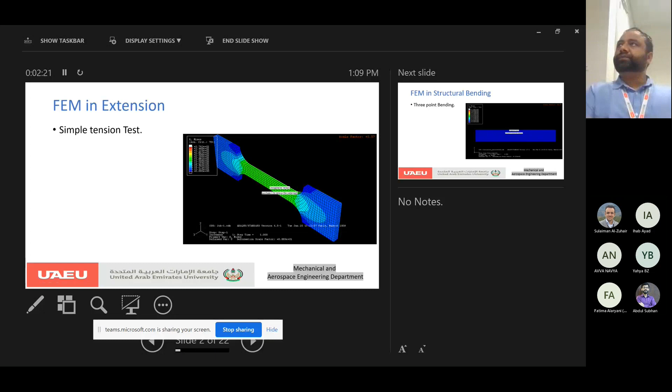Another application is bending, related to civil engineering. A 3-point bend test is done in most classes of problems where material properties are to be obtained. This part is fixed, this part is fixed, and the load is applied from the top. This obtains the bending and flexural stiffness of the material. Usually this is an experimental procedure. Through the finite element method, people have tried to simulate it and obtain matching material properties corresponding to the experimental counterpart.

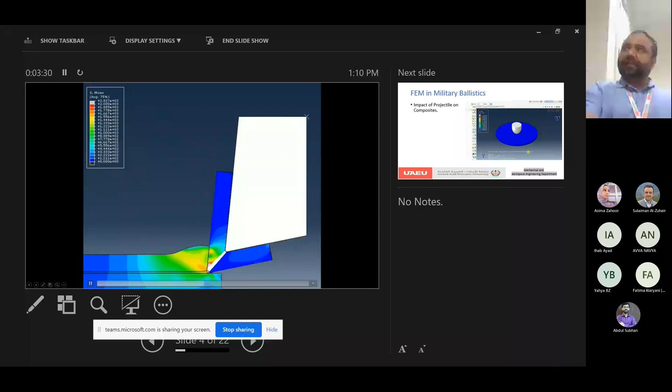This is one problem related to manufacturing, where chip formation is observed during machining. The important thing to note is that though there is chip formation, the tool is also deformable. The chip as a material is deformable for sure. Here the tool is also deformable. That's why you can see various stresses acting on it.

The machining process is a very complex process, and obtaining such a finite element model is very complex in nature, because the elements are getting deleted at each and every section. It's a highly non-linear complex problem. No, not multiphysics. Yes, thermal concepts are also included in the finite element method, and we will discuss that.

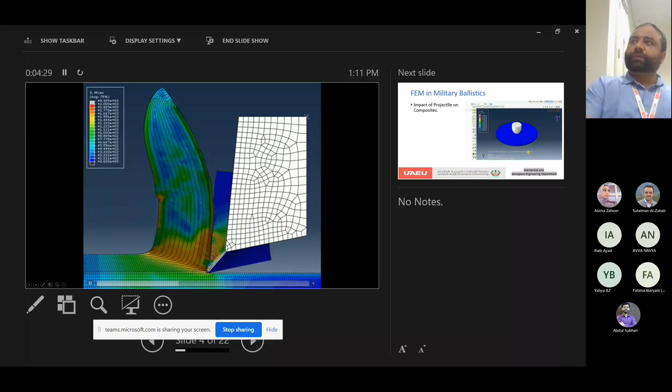Do you make the grid for all the domain, or the grid only about the part that moves? There is a grid. This material is getting fed. This is the feed part. The tool is fixed, and the material is being fed through the tool. No, I'm talking about the mesh. The mesh for the whole domain or just the extended region? Is the mesh only on the colored region, or do the other regions also have a mesh that you cannot see?

My question is that now this is moving up. There is mesh here. This means the mesh is moving? No, this is a movement of the material. This is a dynamic problem, movement of the material. The tool is fixed. At the beginning, did you make all this block as a mesh, and then the movement is inside the mesh? No. Okay, this mesh is moved. Yes, this is moving in this direction.

This is a dynamic situation, just like what happens while machining a material. And the mesh can move in any place, any area. It will move according to the physics of the problem. The mesh moves based on the physics of the problem. At the beginning, on the first slide, this is only the mesh. And then by running, the mesh is moving. Yes.

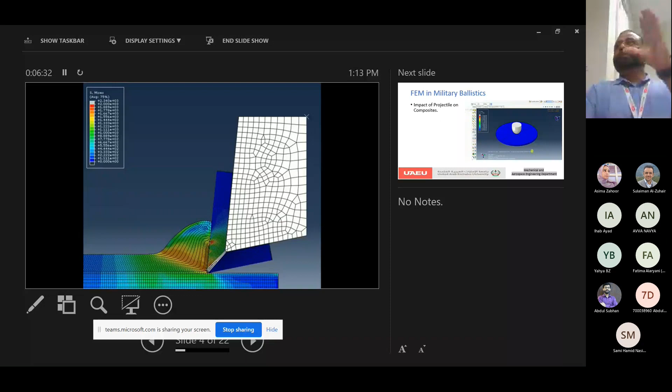And does the number also increase? No, not the mesh number. This means that the mesh size is expanded? No. The mesh is fixed. We will discuss the mesh also. Once the mesh is fixed, it is fixed. After that, this is the physics of the problem through which the cutting happens; this is the chip of the material. So the chip is coming out as the physics is moving, through the physics of the problem.

What about the mesh? The shape can move. In fluid mechanics, we do the mesh for all the domain. For example, if I throw a cup of water, in this case we should mesh all the room. Then inside the mesh, the water can move. We solve for all the domain. But this is my question: is this all the domain? You solve all the domain? No.

Is the body moving here, or is this just the mesh, and you solve only in this area? Only in this area. And in this case, if this area increases, does the number of mesh elements increase? No. Does the size of the mesh decrease? No. It is constant. But how, doctor? Should the number increase or the size change? We can see the expansion. How can the mesh not expand?

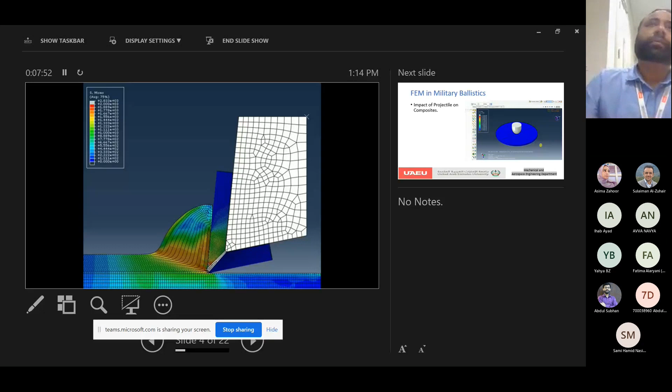The mesh is fixed. For solid problems, the mesh is fixed. How is it moving up? This is due to the physics of the problem; the mesh is moving. Can we move on? Yeah.

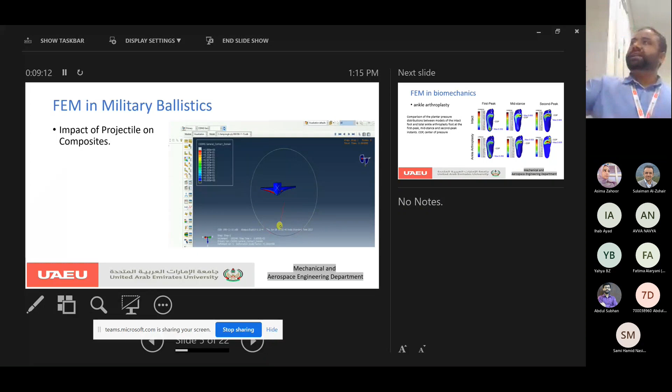We can also see the delamination part. Through FEM, we can actually cut the section and see the details of the inside layers, how the layers undergo delamination during failure. In experiments, this is very difficult to observe, the inside delamination of various layers. So this is one of the major advantages FEM gives you.

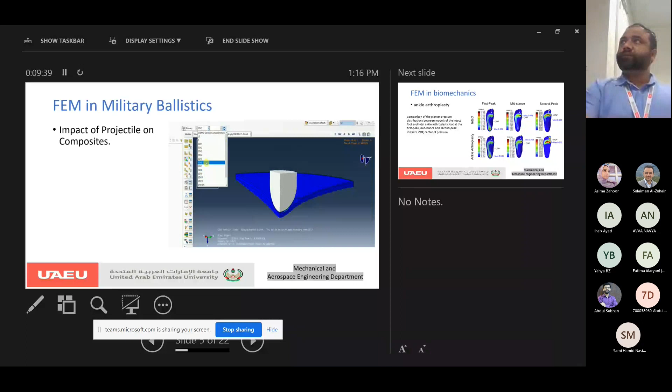In biomechanics, there's this field. FEM is also being expanded in biomechanics and related medicine areas.

This is one of the papers on ankle arthroplasty, which is a replacement of the joint. You can see that the contact pressure is generated at these areas, and these are the first peak. This is an intact ankle, and this is ankle arthroplasty, meaning a prosthesis ankle. This is a mid stance. As the pressure is increased, this is simulated, and externally the contact pressure is increasing. This is for the further increase in the pressure.

So FEM is actually utilized in various fields of engineering. Now we'll see how it solves a wide variety of problems in engineering.

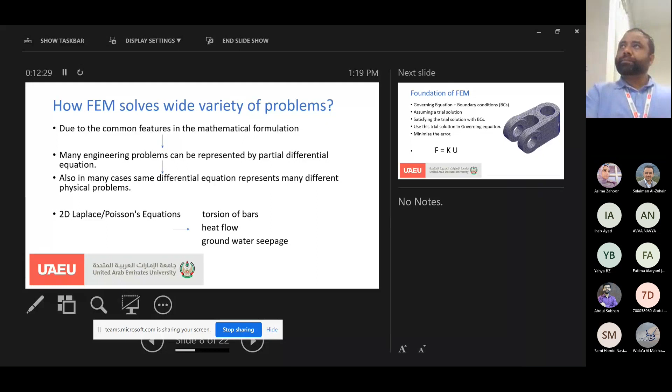How the solution happens is another important area. First of all, in any problem, we have a governing differential equation, which is always accompanied by boundary conditions. So we have a governing differential equation and boundary conditions. What we used to do is assume a trial solution, a simple linear trial solution. Like we need to find out the displacement at this point, ux, xy maybe - let's keep it one dimensional. So ux is a simple polynomial function like a0 plus a1 x plus a2 x square plus a3 x cube and so on. This is a simple polynomial which can increase its order, and as it increases its order, it can capture various deformations that occur on a model.

Once this equation is there, it needs to be satisfied with a boundary condition - in FEM this is known as the natural boundary condition. So this simple trial solution satisfies the boundary condition, and then the equation obtained is used to solve the governing differential equation. The overall idea is to minimize the error. Once the error is minimized, we finally end up with force equals stiffness times displacement. Because any element in these finite element meshes depends upon two field variables: force and displacement. The stiffness is the material property, which is K. So each and every element has its force component and displacement component, and they are related with a K matrix, which is a stiffness matrix.

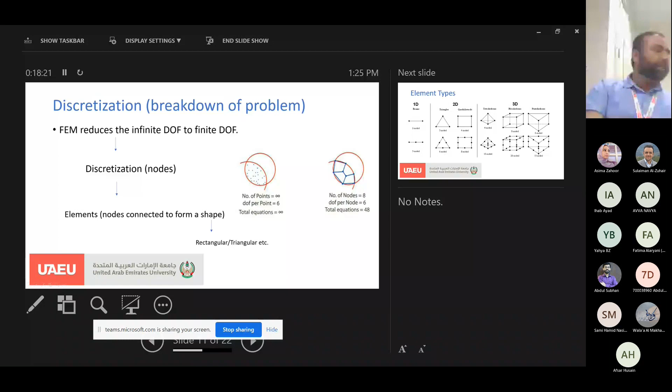Then to represent and solve 2D problems, 2D elements like a triangular, 4-noded quadrilateral, or maybe a 6-noded triangular element can be used. As we increase the nodes, we increase the degrees of freedom, and further we increase the overall equations. Degrees of freedom remains constant per node, but as the nodes increase, the overall equations increase. So you can increase the nodes to obtain a more accurate solution, but the overall computational resources will be much higher. Something similar goes for 3D, because in 3D all 6 faces have to be there, so the nodes increase in size, and this increase makes the problem more complex. This is the reason why computers are being introduced to solve these complex problems using the finite element method.

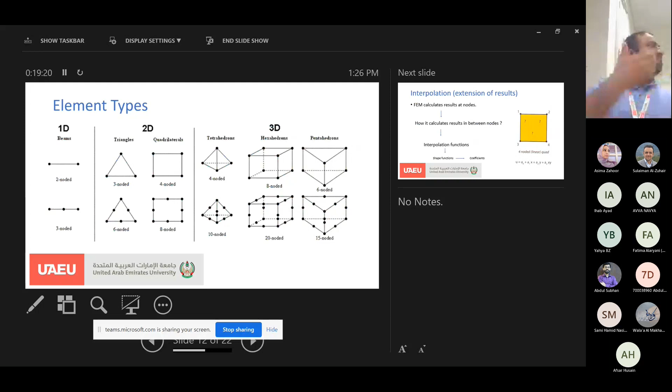Now we know that these nodes are the building blocks of any problem, and all the calculation happens at these nodes. Calculation means the displacement is obtained at these nodes, and using the displacement we can obtain the stresses, strains, etc.

At these particular nodes, the field variables are there: stresses, strains, displacement, etc. But what about inside the element? Inside the element, the information is not available because nodes are not present. If you put a node anywhere, it will give you information of displacement, stresses, and strain, but inside the element, nodes are not there. So the FEM interpolates the results, extending them using simple shape functions. So FEM calculates the results at nodes only, but these results are extended at unknown or any required points inside the element. These are known as shape functions.

The shape functions are represented as: U1, a displacement at this node, U2, maybe the displacement at this node, and similarly for these two also. So the overall displacement inside the element will be N1·U1 plus N2·U2 plus N3·U3 plus N4·U4, where N1, N2, N3, N4 are the shape functions which represent the interpolation of the results over the element.

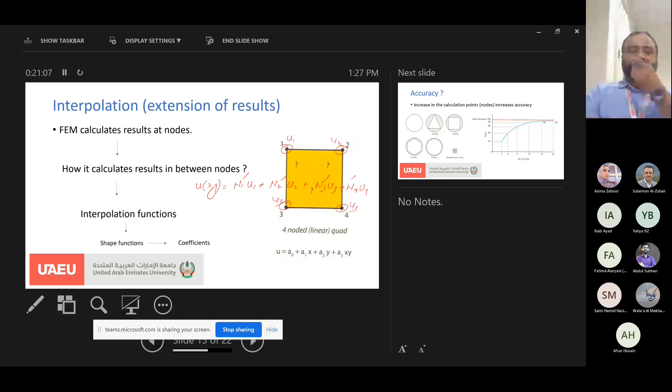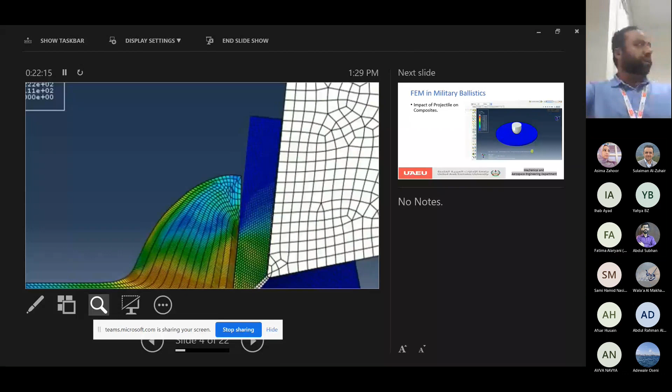Now to understand this more, we will go back to one of the problems that we have seen. Let me zoom this. Now these are the elements - everybody knows these small rectangles are the elements. We know these have 4 nodes, 1, 2, 3, 4, or here you can see 1, 2, 3, 4 nodes. But regarding the deformation, they have information inside the element also. This deformation information inside the element is produced by shape functions, which are linear simple interpolation functions used to give the deformation over the whole element. Otherwise, we would have gotten the deformation only at the nodes. So the shape functions connect themselves from one element to another, and they give a progressive deformation profile over the surface.

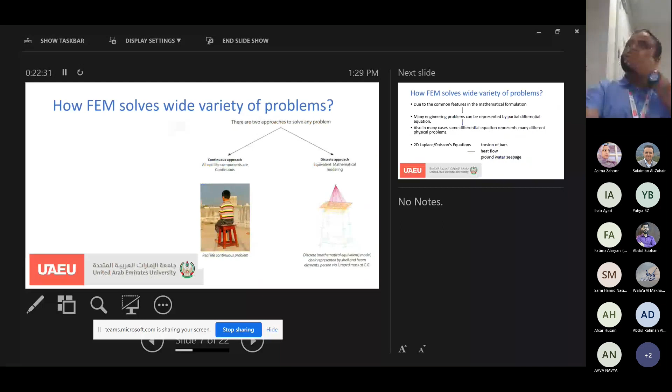Now, what about the accuracy? The accuracy of FEM depends upon one's choice, how accurate a solution he wants in the results. For example, this is a simple circle. If we shade it with a triangle, this much part is left out. If you make it with 4 lines, the rest of the part is much smaller. If you make it with 6 lines, the remaining part becomes even smaller. So as we increase the nodes, our solution accuracy increases further. In this graph, it's clearly shown that as the number of nodes or lines increase, the exact answer, let's say 100, is approached with a curvature converging onto it.

For the most accurate result, you can see that it is having a displacement about the same as what it should be. So an increase in the number of elements or nodes will lead to higher accuracy.

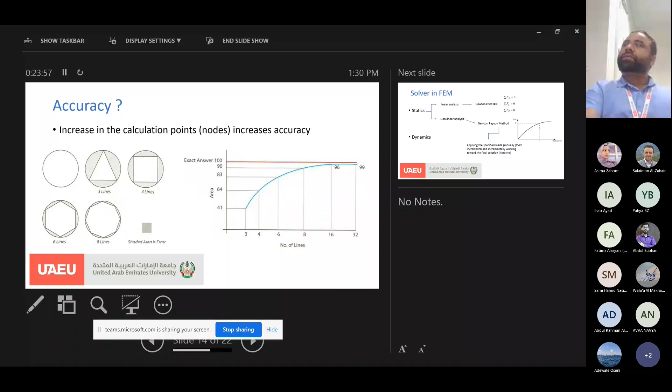A small advanced part of the FEM that we're going to see today is the solver used to solve the problems. Any problem can be defined in two general aspects: either it may be a static problem or a dynamic problem.

In the static problems, we may be having a linear analysis or a non-linear analysis. In the linear analysis, Newton's first law governs every problem, which represents summation of all forces equal to 0. That means there is no acceleration in the problem.

For the case of non-linear analysis, the solver uses the Newton-Raphson method, which is applying the loads gradually. The same formulation is used, but in non-linear analysis you cannot apply a lumped mass overall throughout the problem. So you do that incrementally via the Newton-Raphson method, where loads are applied incrementally.

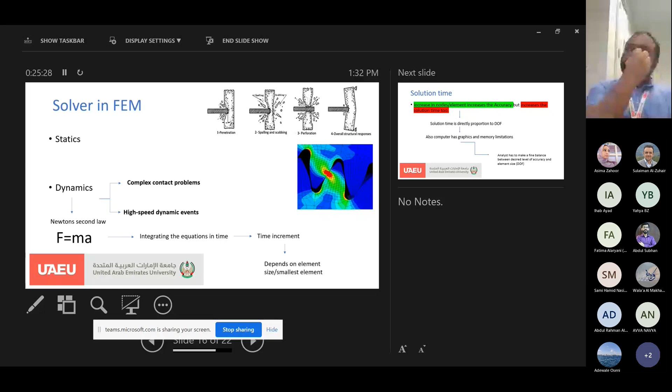In a dynamic situation, complex contact problems can be dealt with, or a high-speed dynamics event can also be solved. So a dynamics problem requires a formulation F equals ma, where F represents all the externally applied forces minus the internally applied forces, m is the mass of the overall model, and a is the acceleration. If the model is accelerating, this formulation can be used.

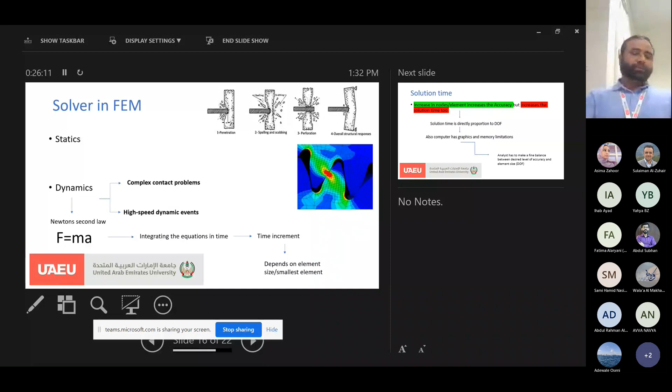This is a basic governing differential equation in dynamics, but this equation further needs to be integrated to obtain the time increment. A very simple version is written here, but usually it involves x double dot and the applied forces. So this is the governing differential equation that actually needs to be solved in the case of a dynamic situation.

For the dynamic situation, there are many examples, like a projectile impacting a plate or a ballistic material. So this is, for example, a ballistic material. A projectile is impacting this plate and moving out from this side. So this is a dynamic behavior.

This movement of the projectile impacting and coming out from this side can be represented on a timeline. These are the small events on this timeline: movement of the projectile, getting impacted, perforated, and getting out from the other side. All these events are there on this timeline. So FEM solves this using a time increment. All dynamics problems are solved using a time increment formulation.

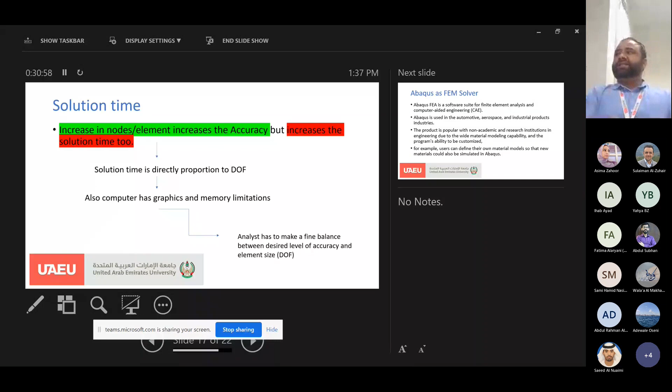Now, FEM as a solver: we have many FEM solvers available. We have ANSYS, we have Abaqus CAE, we have Nastran, and there are various other software packages available to solve FEM problems. Whatever basics we have gone through for statics and dynamics, we'll see in the hands-on session also.

These solvers are used in automotive, aerospace, and other industries. And these products are very popular among academicians and non-academicians both, because they are able to solve their problems with them. Even industrial people do not require a deep knowledge of the finite element method; they can use it just as a modeling software, use the basics, and solve their problems.

However, the software package Abaqus has the advantage that a user can define their own tailor-made materials. That means through the differential equations, we can actually put in our own material. For example, in composites, a well-defined failure material is not available. So we can use our own well-defined materials. For that, we have to write a small code. So that part can also be done in these FEM solvers.

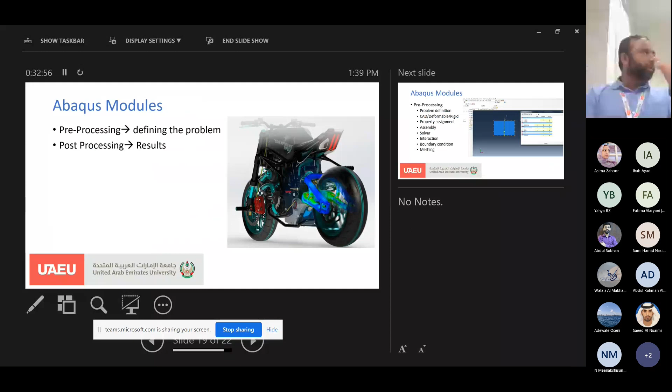It has two major parts. First is pre-processing, in which we define what exactly the problem is. And how do we define the problem? First of all, we define whether we have a deformable material or a rigid material. We will assign a property to that material: how much stiffness it has, how it fails, which law it will follow to fail.

We will assemble it if it is required. We will assign a solver to it. If it is a dynamic problem, we will assign a dynamic solver; as I told you, it requires a time increment and integration in the time domain. If it is a static solver, it will require a basic Newton-Raphson method to solve it.

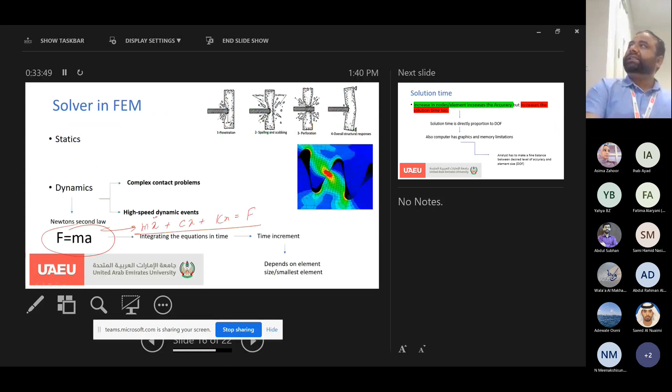Then for all problems, we need to put the boundary conditions. This is an essential step. Deformation, property assignment, assembly, and boundary conditions are the essential steps required in every model. And then finally, we mesh the model. There are many meshing techniques available which make the mesh proper in your case. And then the post-processing of the results is done using simple output files. We'll see how that is done.

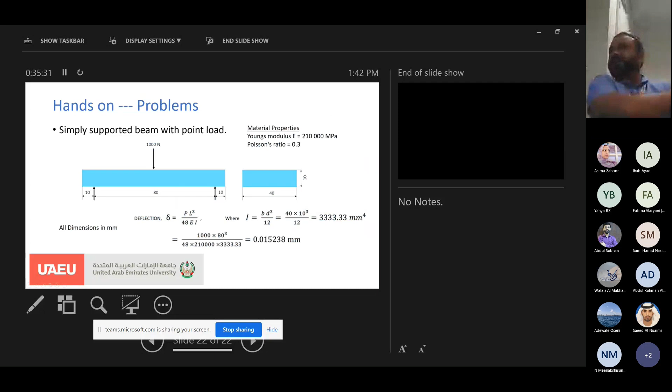If you put in the relevant values, you'll get the displacement as 0.0152 mm, something like that. Now we'd like to see if FEM can produce this result. We'll see quickly, because we have a shortage of time, in a simple hands-on. I'm using the software package Abaqus for this simple problem.

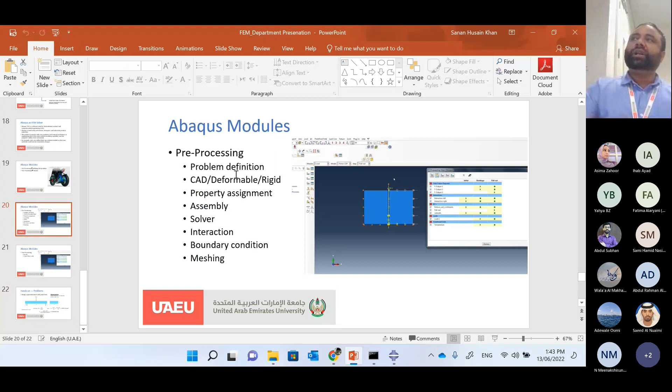As I said in the slides, the first part is to define your model. My beam is deformable, so I will define it as deformable. And let's make it 3D so that it is more visually acceptable. So this is a 3D deformable beam.

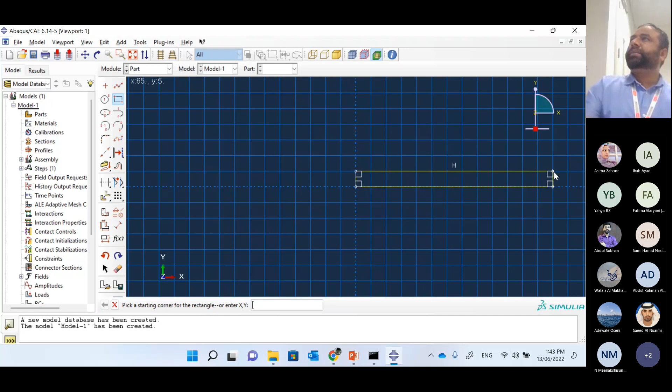Okay. And what are the dimensions of this beam? 100 by 10 is the 2D dimension. So we'll keep this as 100 by 10. This is 100, and the width is 10.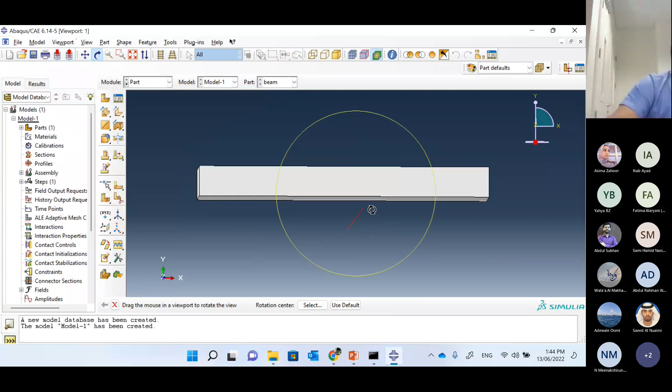The width of the beam is 40. In this side view, you can see. So the width is 40. This is a simple beam for us. This looks a bit trapezium type, but this is not. This is due to the graphics issue, I think. Okay, so this is not like a trapezium.

So what are the other things that are required? The other thing is property. So we have to put here which property it is. For the deformation, we require only the Young's modulus and Poisson's ratio, because this is within the elastic region. So we'll define only these two. If the plastic region also needs to be modeled, we need to see its permanent deformation or its failure. So the plastic nature of this needs to be modeled along with the failure pattern.

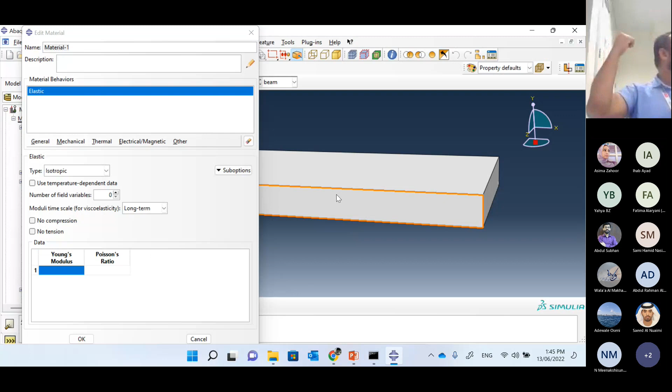So we have in the elasticity, elastic model, isotropic. It needs to be seen that the material properties are in some units, and these are also in units. However, during defining the problem, we have not used any units because this is dimensionless. So whatever dimensions we are assuming here, we will get the results in that also. So I have used mm. I have put 100 like that. So I'll get the results in mm, provided I put the Young's modulus also in mm.

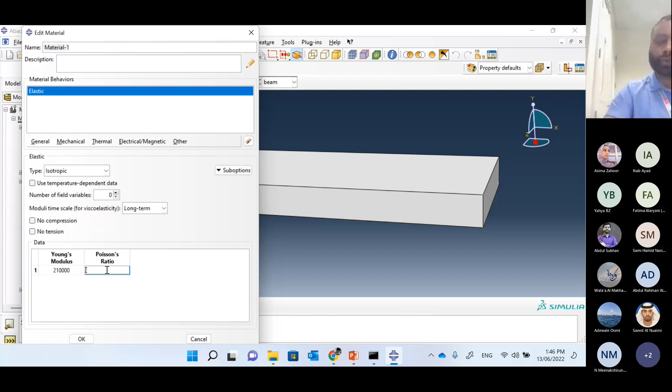So Young's modulus is 210,000 MPa. MPa is Newton per mm square, so we can put it directly as 210,000. Poisson's ratio as 0.3. And that's okay. So this will model the elastic part. For advanced users, if we want to model the plastic parts also, plastic models are available to model various plastic deformations. And the failure can also be modeled.

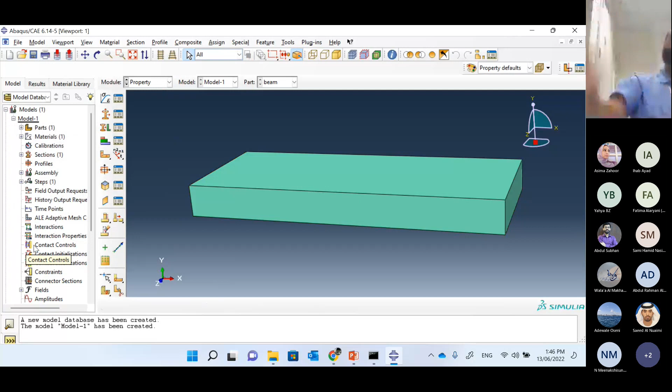So once this material is modeled, we will assign this material to this beam. Now, one may ask why this assignment of the material is required. I have defined the properties, then it should take these properties. But the assignment is required because we may be having two different materials. So the software does not know which material to assign which properties. That's why assignment of the material is important.

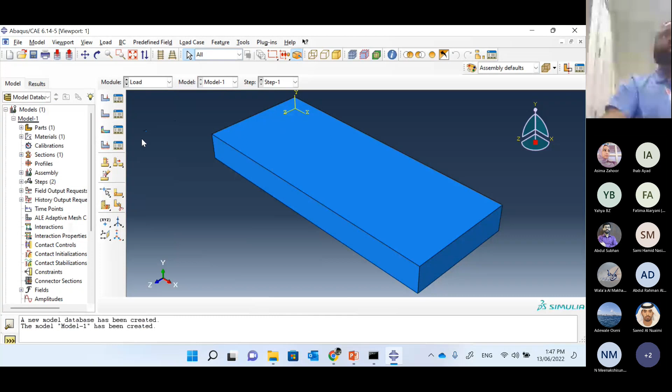The third step is assembly. Although it does not require any assembly, we just keep this in assembly mode. Then a step will define which kind of solver I'm using. Since this is a static problem, it will require a simple Newton-Raphson method to solve this. So a general static condition will be used. Interaction: it does not have any contact interactions, so we will not use this. Load is the boundary conditions. My boundary conditions are that it is fixed from the two sides and the load is applied from the top.

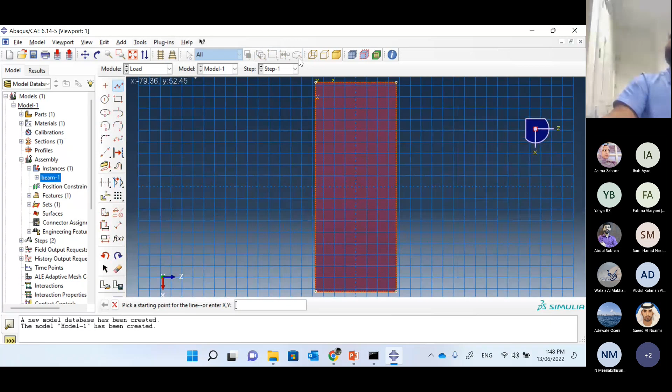Now to fix it from this side, I need one node here. So to determine the location, I will try to partition it. I can crop this material or partition it. This is in dependent format. We can make it independent. So I can partition this face. A simple line can be drawn, and then this can be offset. Add tool, offset. This entity needs to be offset. How much offset? 10. 10 from here, 10 from here. So let's offset 10.

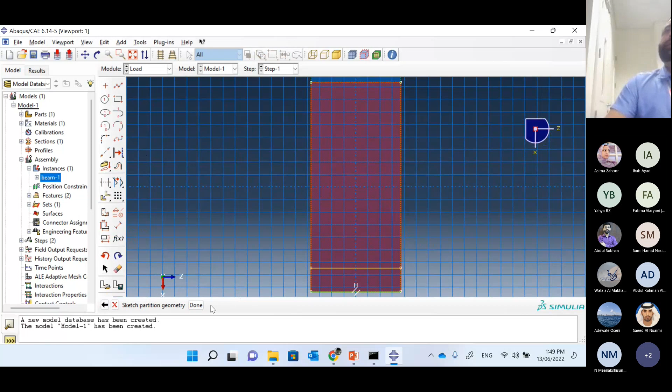Here the offset feature is there. And then again we can define it for this one also. Feature, add offset. Offset distance is 10. So these are the two offsets we have.

Now there is a load point also. To define the load point, we can just define one line here so that the load can be applied on these particular nodes. So this is the location for the load line. So we can directly section it as a cell.

So this is the part on which we can apply the load. Now before applying load, I would like to first of all curtail it, because this is a simply supported beam which is not allowed to move in the y direction. So we'll curtail it in the y direction.

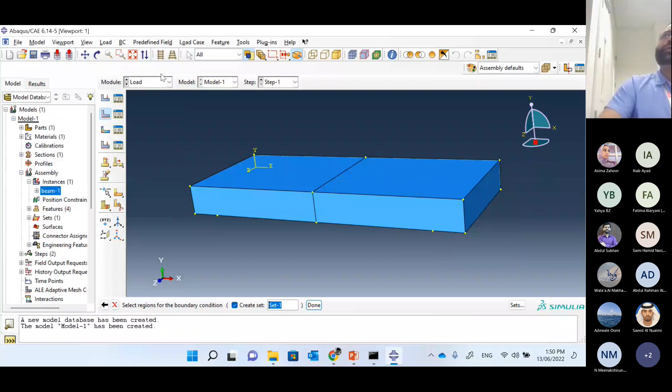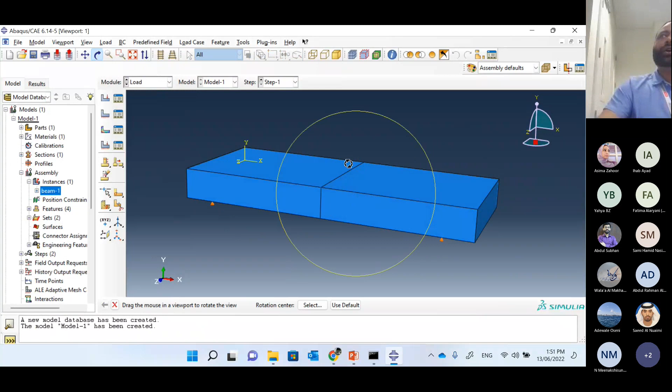So for a simply supported beam, these two directions are curtailed. Shift select this. These two directions are curtailed. U2 is not allowed to move down. So this is the boundary condition we have. The rest of the boundary condition is the load boundary condition. So you have to apply the load here. But the most important thing is to apply the load on the node.

Since we have still not defined the mesh, first of all, we will define the mesh and then we will load it. Now to define a mesh, first of all, we have to discretize it, so we can have a discretization using a seed. So in this way, we have discretized it, and we can actually put the elements also on these edges. So this beam is uniform. So as and when the load is applied, uniformly all the points will move. So we can actually put some elements here.

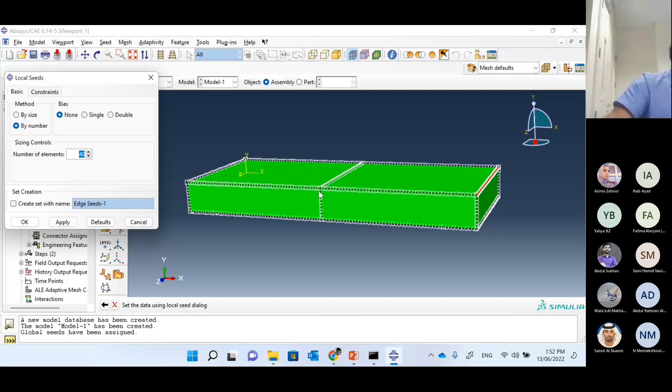Now the overall load to be applied here is about 1000. So we can put something around 50 elements here on this part. So one node will be here shared from here, and one node will be shared from both the sides. So we can put 49 elements in fact. So that will make 50 nodes.

Now element type, which type of elements is required? So for element type, it has a library of various elements. So for now, 3D stress hexahedral elements are the best suited for such kind of stress deformation problems. After that, we can actually mesh it. And a simple mesh is generated over this. Again, I'm saying that this looks like a trapezium, but this is a simple beam. You can see that it is a beam.

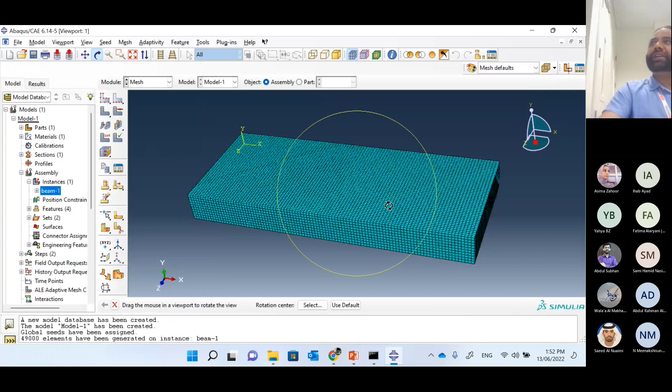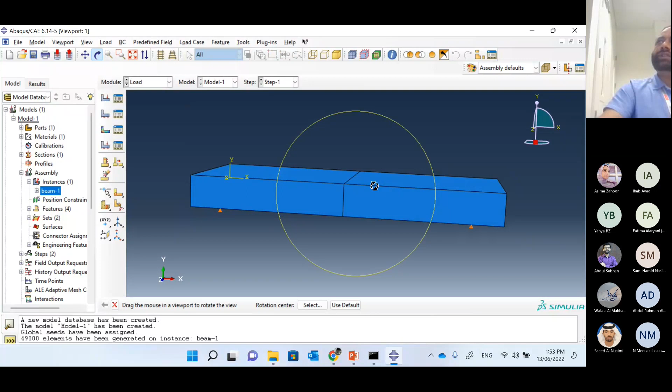So now these nodes which are here, they will be exposed to the loading conditions. So we will again go to the load module, and we will see that these were the nodes that are present here. So rather than that, we can select and make these nodes in a bunch or a group. We call that a node set. Load node or load set. And we will select all these nodes. Selection is very important. Otherwise, the nodes will be...

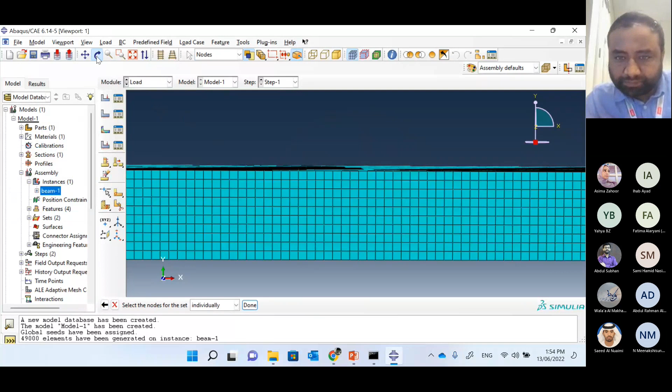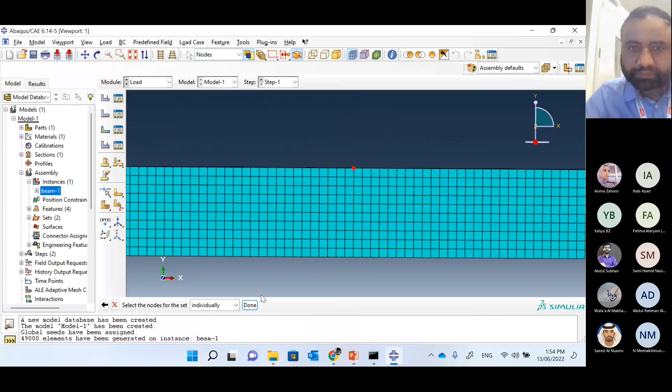This is my point which needs to be selected. Let's see. I have to select this. Node set. Let's see if it is. Yes, now it is selected properly.

Select the nodes based on the line, because my applied load is on the line only, on the surface. So what I will do, I will divide this load in all these nodes. As I said, I will apply the load proportionally, discretely. So I will divide this 1000 over these 50 elements.

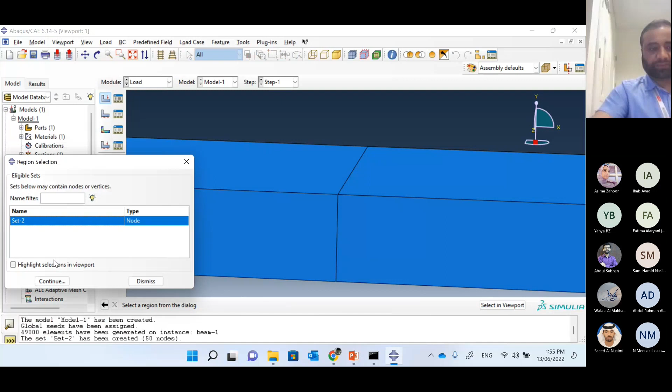So when I apply a load from here, concentrated load onto these sets, then this direction is U2, and I will apply 1000 by 50. So this is 20 newtons on each and every node. I have to apply a negative sign to put it downwards. The number is based on the number of nodes.

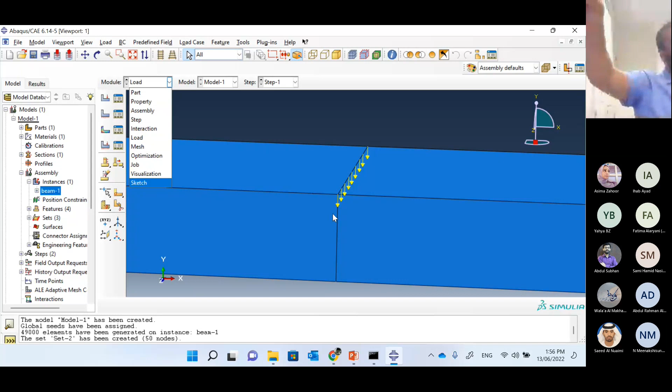How do you divide by the number of nodes? I have first of all created 50 elements here. You already know there are 50 elements? No, I have generated 50 elements. Okay. During the mesh, I have written there 50 elements. Although I have written 49 because one end node is shared in this case. So one element is gone there. So 49 elements will be there. So overall on this there will be 50 nodes.

So we have defined the load and mesh, everything is done. So let's see if we can get the results. If any error is there, we will try to sort it out. If you can see in this message file, first equilibrium iteration for consecutive divergence checks. So in all these cases, equilibrium equations are being solved. Sum of all the forces on the nodes equal to 0 in the x direction, y direction, z direction.

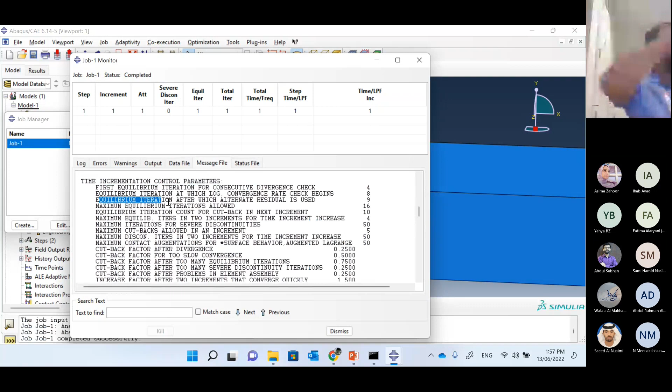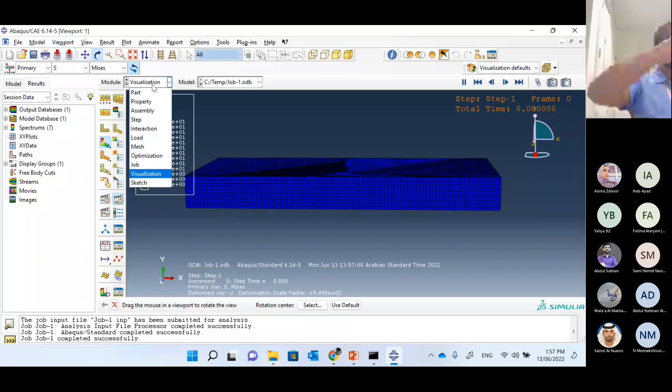So this is a deformation that we have got. I don't know if you can indicate it. It's okay. So there is only one increment that we have defined, I think. We can increase the deformation increment in the step module. These modules are same in every software. So in the field variables, we need that this should be incremental. So we can actually make this incremental, evenly spaced time intervals, maybe 10.

So this will now change it so the deformation will be in 10 increments. Again, this increment is the same time value that we have used and we have discussed that. Since we have increased the increment, it's taking more time to solve the same problem.

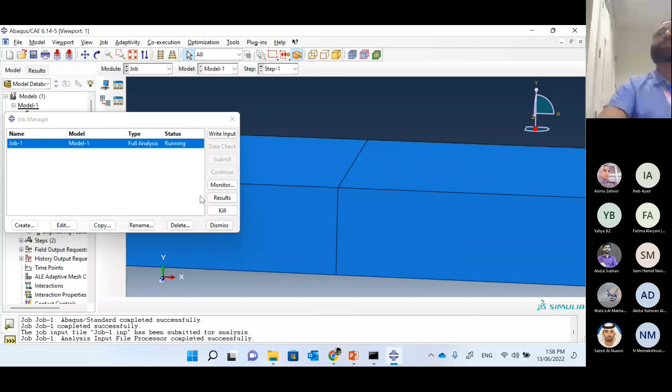What could be force distribution inside the body, in addition to the density of deformation? I have given a force of 1000 Newton over the line on this. This is a side view. No, this is a simply supported beam. In a simply supported beam, I have used it like that only. I could have used the way you are seeing also. We could have distributed the load on the other side also. It depends upon the problem. In this problem, this is like this.

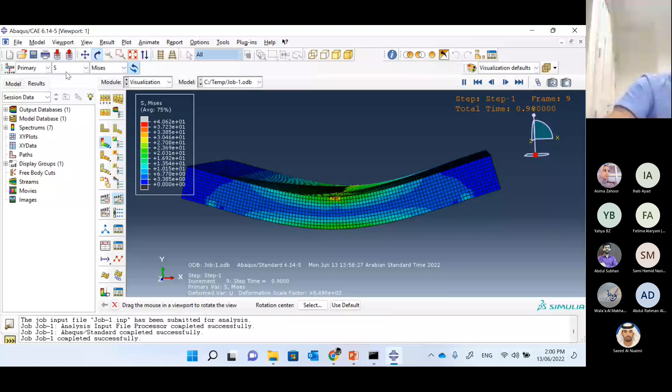As a result of this distributed force, there might be forces. Yes, we will see that. And it does give this distribution. So as a result of this, now the force distribution, obviously the stress of the force distribution is same. The stress is force per unit area. So you can see the distribution of the stresses or forces as the bending is happening.

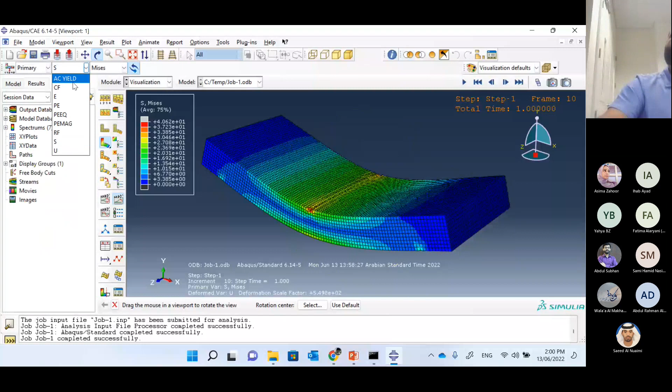Now the important thing that remains: can we achieve this displacement or something very close to this? So let's see if that displacement is achieved. First of all, we require a displacement, and this is in the y direction. So we need to take u2 into account. We can draw the graph also, or we can probe the values directly over the nodes. You can see this value here, u2, and you can see that it is changing.

So this is my load point, 0.015, something very similar to what the bending equation has arrived at. We can draw the force graph also afterwards. You can draw various other field variables that are available. These are the default field variables: the yield point, the force, the strain, the plastic strain, but we have not used plastic strain, the equivalent plastic strain, the magnitude of the plastic strain, the reaction force, the stresses, displacement.

So these are the default ones that the software gives. We can choose our own, we can choose some extra also. If we are defining some non-linearity, we can choose that output variable also.

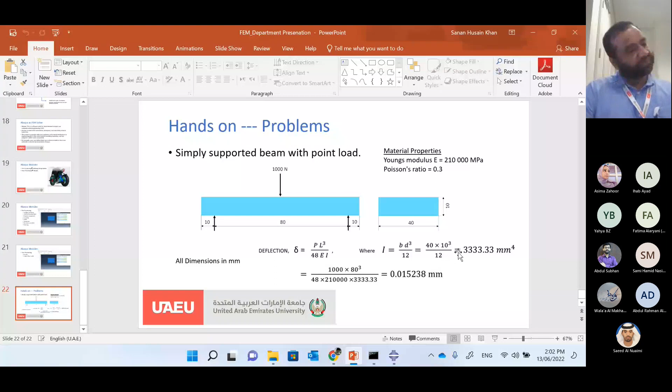Here, I think this one is the Euler-Bernoulli beam. I think this is like a deep beam. For a deep beam, we have to use the Timoshenko beam also. The 1/48 here is for Euler-Bernoulli beam. Because the thickness of the beam with respect to 80 makes it a deep beam, we need to add the shear deflection also. Shear effects from the Timoshenko beam can be added. Then we need to add the Timoshenko, obviously.

The finite element value is a bit higher, 0.016. Here is 0.015. Yes, these are there. But this is also important: the Timoshenko beam is considered for a beam that has a large shear effect. That is accounted for in the Timoshenko beam, in addition to the Euler beam.

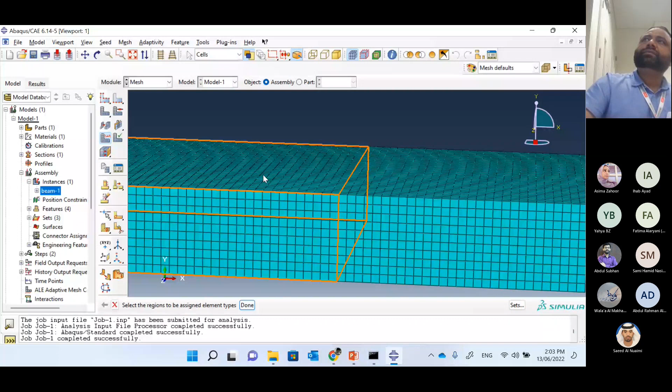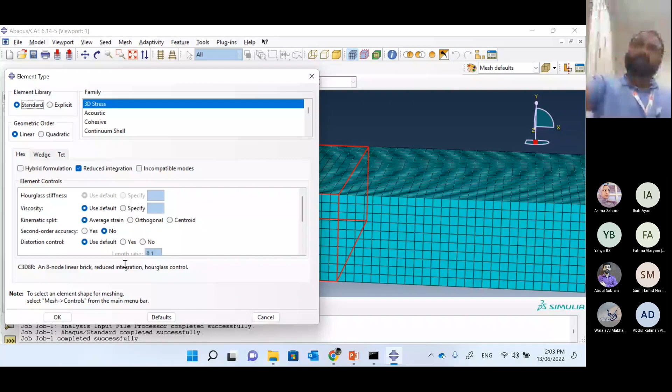This one here, what element do we use? We have used simple 3D elements, yes. We use mesh, right? So these are the 3D brick elements, 8-node brick elements. I've kept most of the things as default. You can change, reduce the elements, increase the elements. For 2D we used to check the elements. Nowadays, in 3D stress analysis, we take the C3D8R elements, the solid elements.

So this is the basic introduction of FEM. This problem looks very simple. You have solved this problem using a simple deflection equation in a minute or so. But using FEM, it requires time to solve, because it requires modeling. Otherwise, for non-linear problems, contact problems, and other higher order problems, FEM is a very specialized and important tool to solve and give you an idea about the solution results.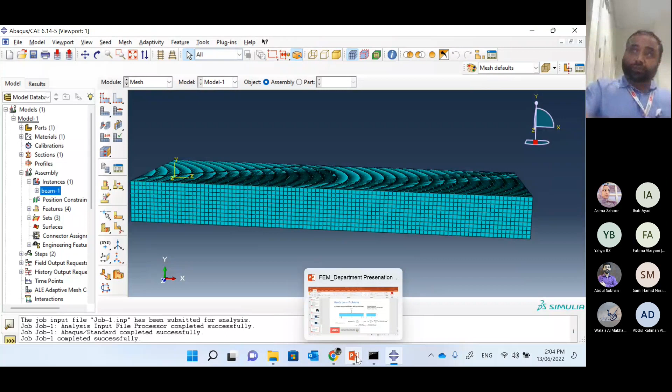So this is what I have to show. I have tried to keep this presentation as simple as possible so that the graduate and PG students are also able to understand.

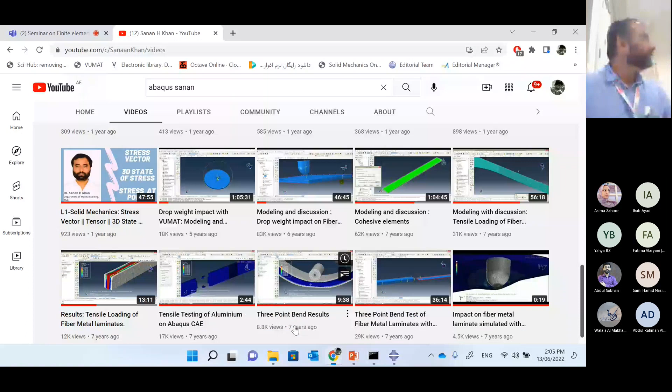Sorry, fluid structure. Yes, people have used it. Because this is related to the question raised before. In fluid structure interaction, we have two types of coordinates. One is for the structure, which is, as you said before, the type of element distribution is just this type. But fluid is just like in fluid, yeah, you're right. So then we have some kind of, what you call it, should satisfy both the structure and fluid problem.

This one here is based on Abaqus, right? Yes, Abaqus we have used. We can use any other tool also. ANSYS can also be used, or any other tools. That's not the problem. So the question is regarding the moving coordinates, moving materials. Maybe we need to explore more detail on it because it is a totally different approach between the fluid and the structure.

I think you are talking about the finite difference method. No, because in the fluid usually we use finite volume. Here we use finite element and then we combine it. So the problem is how to make it compatible. I never used this before. But in ANSYS, there is Fluent. Through Fluent it works. And there is also what we call the immersed finite element. That's also a totally different approach from the one that we discussed.

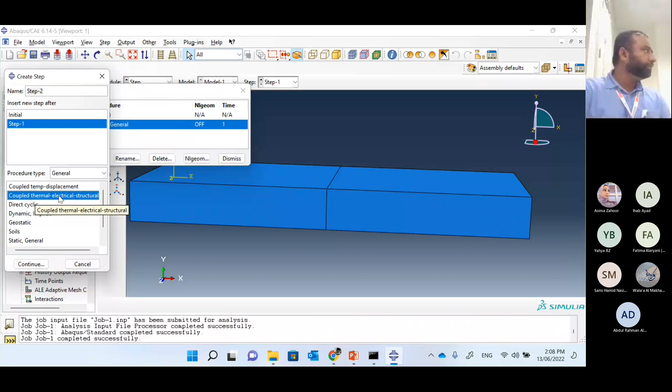This one cannot model the equations if the medium of the material is fluid. People have modeled it on YouTube. We have seen that people have modeled fluid solid interaction. But the way I have interacted with people, I have seen that ANSYS Fluent is mostly used to solve such types of problems.

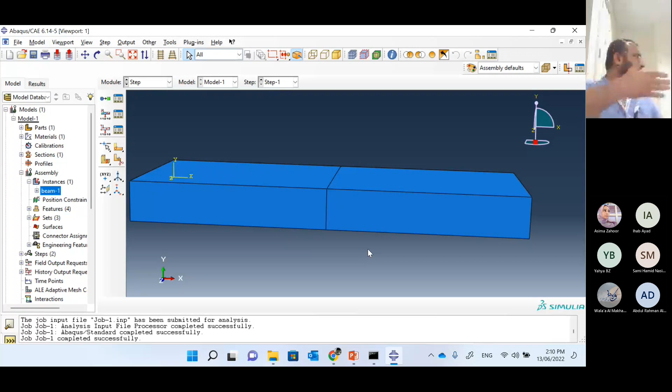So in composites, we have taken 6 layers, 8 layers, and we are using composites along with metal layers, called fiber metal laminates, hybrid laminates. These are used in aircraft structures because composites are very brittle in nature. Once they fail, it is catastrophic. So metal layers are added in between so that even if it fails, the material can have a ductile nature and can take the load.

So in some cases, we have 6 layers, 8 layers, 5 layers also. In between them, we have put cohesive elements. Cohesive elements are the elements that model delamination between the two surfaces.

Using a cohesive technology along with a general contact algorithm, we've used a general contact, surface to surface contact, where the one which has higher stiffness is the master surface, but the one which has lower stiffness is the slave surface. Because in contact mechanics, you have a master and a slave surface. After that, we have used a rigid impactor.

So the impactor is considered rigid. It is considered that we have not seen deformation for the impactor. So it is made rigid, non-deformable.

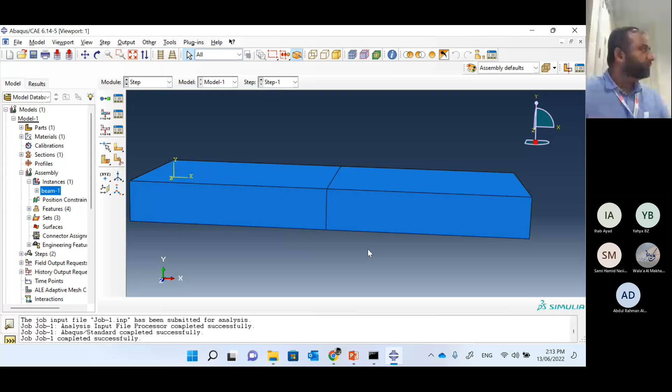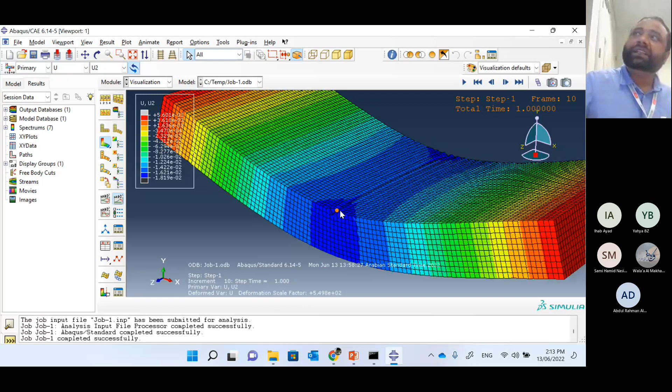You can see that this is deformed excessively. Even if I apply a damage equation to it, a damage formulation known as Johnson-Cook, they have given a damage formulation. If I apply this damage formulation, it will make the material damage, and the damage will be seen by removing the element from the mesh. The element will be removed and it will show damage behavior. We have many videos here to show the damage, like in this one, showing the damage behavior.

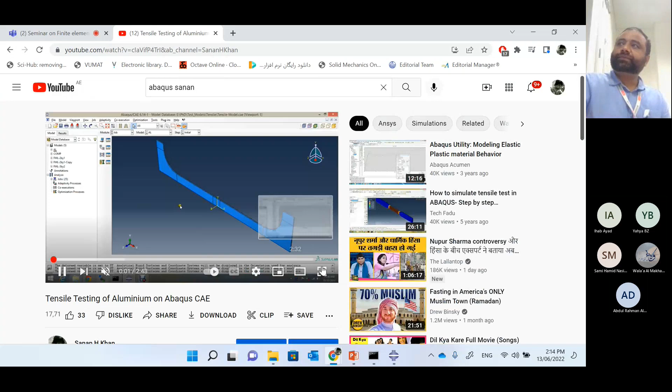It goes to failure, right? Yes, for the failure. In this one, I have also used the damage equations from the Johnson-Cook model. So let's come on to the model.

Now, as you can see, all the cells are getting deformed, and as and when the material's excessive limit is reached, this is the failure. So it looks like the material has failed, but what happens is that the elements are actually being removed from the mesh, and they are not taken into account during the calculation.

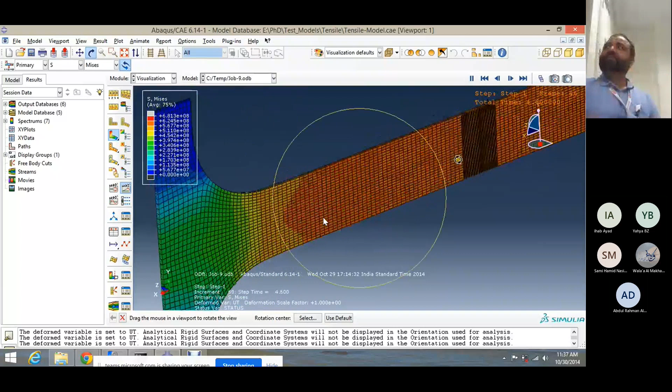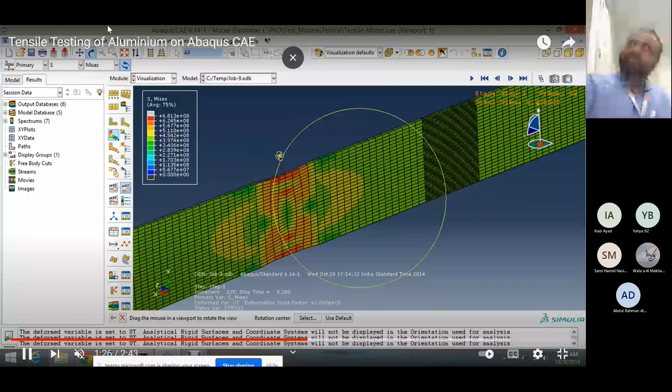To make this visually similar to the experiments, these elements are removed, so now you can see these elements removed from the mesh. These elements are being removed as and when the plastic strain exceeds the limit, and as you can see, they are being deleted.

There is an experimental basis, that is what I have put in, embedded in the code. From the modulus of elasticity you will understand it has to fit this form - no, the modulus of elasticity works only till the elastic limit. After the elastic limit, the plastic region starts, and then we have the ultimate strength, the final strength, and the corresponding failure strength. These two are the important criteria.

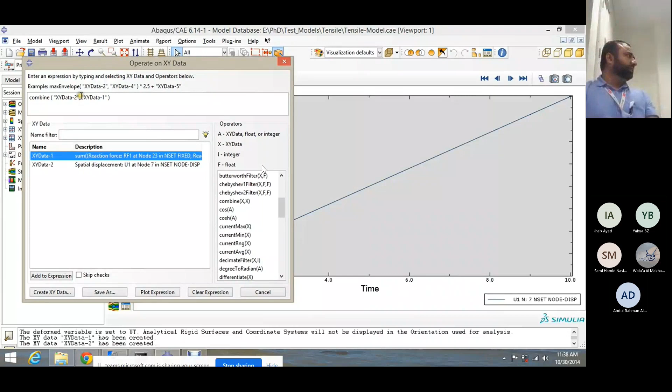There are various other damage models also, depending upon which type of damage model we are using. This is the ductile damage model that we have used. So this is what we have.